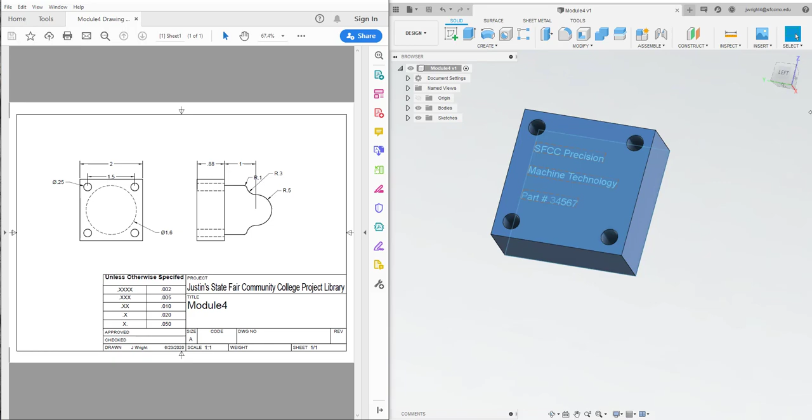We need to put the text in on the back side of this thing, and then we can do a second operation. The second operation will include making this shape on the back side. Now there's a couple different ways that we can make that form or shape. Drawing wise should be pretty straightforward. Manufacturing the second side should still be pretty straightforward, but we can play around with a couple of different ways to rough that thing in, maybe some best practices and just some options.

So what I want to focus on today is really two setups, creating two setups within the same drawing, and then also working on this 3D shape, being all curvy on top. All right, so I'm going to get this guy out of here and start a new drawing. I'm going to put it in my module, or my 134 folder. I'm going to call it Module 4 Video, and we will save it in Module 4. That way we don't confuse it with anything else.

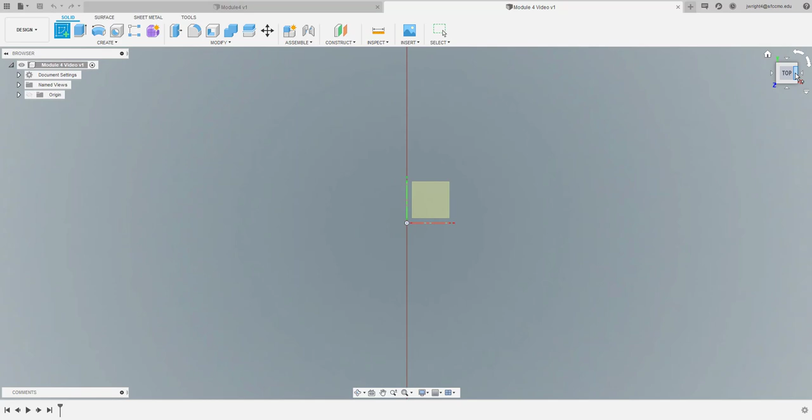Alright, so here we are. We're going to start out just going on top. That's probably not the best way to start out. I probably could have started out this way, but that's okay. We can change it as we go. It'll make drawing just a little bit easier. So square this thing back up again and zoom in and pan down just a little bit. Okay. I'm going to go ahead and make the shape of this part. I'll pull my PDF back up on the other screen so I can remember exactly what I did. Alright, so I'm going to start creating my sketch.

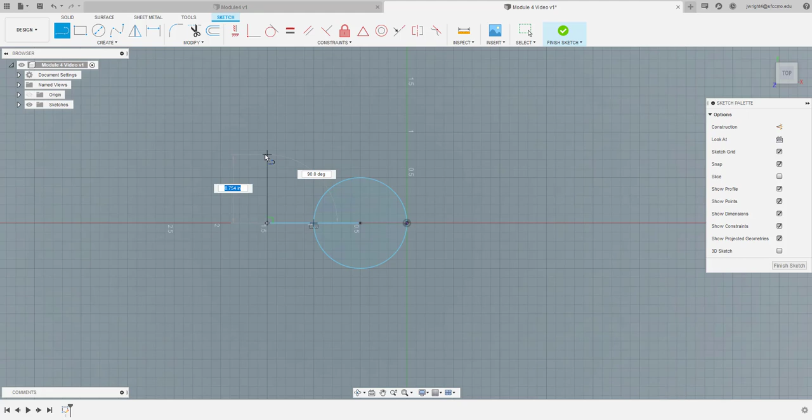It looks like from here we've got about a ½ inch radius. We're going to go from here to here with that guy, and this other diameter is 1.6, and it goes back, let's take a line back here from the center of this point. We go back 1 inch, 1 inch will put us right there. Just get ourselves some shape here, and we need to come up a little bit, and we need to get our 1.6, so we need to go up 0.8, and that is 0.88 on that, and then we'll just go tab, and we'll go 90 degrees. Okay, so we got that.

We can just come straight down from there. Just bring a line down here, and we can trim that out as we go. At this point, I'll need to extend this line out to here, and then I'll trim away a couple unnecessary components. Pretty sloppy on the drawing right here. I could trim this and this as well.

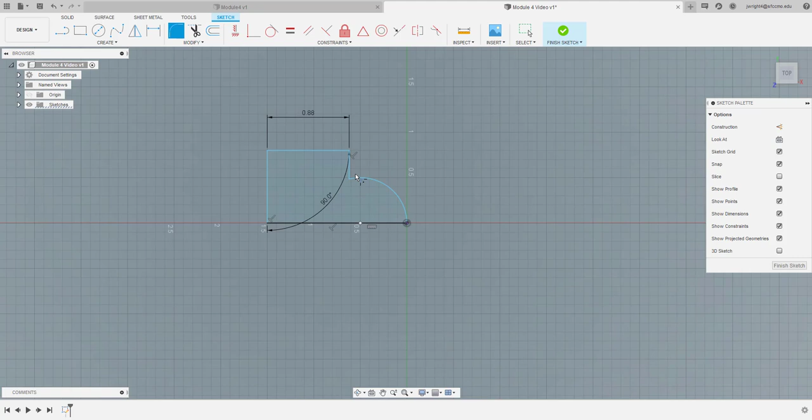Now I think I've got a 300 thousandths fillet that goes in right here, so it's going to be 0.3, get a little bit bigger, there we go, bring that in just a smidge. Okay, and I got a 100 thousandths fillet that goes around the outside edge here, so put this here. Whoop. Nope, get that thing on there.

Alright, so that is going to be my first part of this thing. And maybe, I think I'm off just a little bit here. I started looking at one thing and started working on another. Let's see, let's go back and double check a couple things and make sure that we're jiving right.

So from here to here is 1 inch, yes, and that makes that 880. Overall height is there, and then we are ½ inch from here. Yeah, so we're good. Okay, just taking a look at two different things that I had going just to make sure that we're still staying with it.

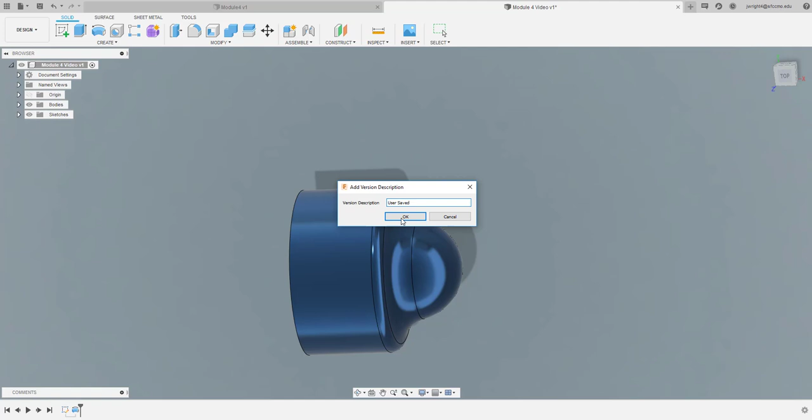I have not drawn my square on there yet, so what I'm going to do is I think I'm going to go ahead and finish this sketch, and then I'm going to do a revolve, and so it's already highlighted my profile. I just need to select the axis that I want to do my revolution from, and so that takes care of this part of it. Hit OK. I'm going to go ahead and do a quick save, take care of saving that part.

Something looks a little bit off here. So if you look back at my original, I've got this curvature here, and then I've got this radius here, and then I've got another radius, and if we pull the other one back up, the curvature is not quite the same. So I got something janky going along here. So I'm going to go back into my drawing,

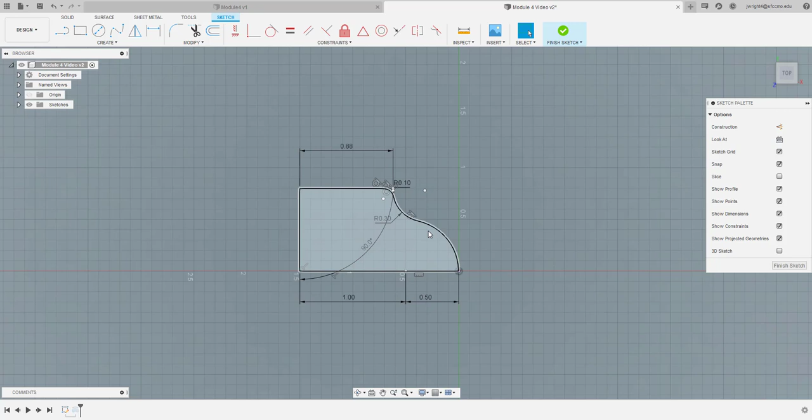and I've got a dimension off somewhere, and I've got my ½ inch radius, so let's just put a couple dimensions here to see what we got going on here. So we've got our ½ inch radius here. Yeah, so too many dimensions on it is going to start to constrain it beyond the constraints that it's already got. So it's already got this ½ inch right here. So if we take it out, then we make ourselves good again. So we'll take this out, delete it. Now we can probably put this dimension here and probably be okay with it.

Yeah. Okay. So I've got a 300 thousandths dimension there, but I've got a little bit more curvature in this area. So what that's telling me is that my section right here must not be 880. Let's pull this back up here. So this section cannot be 880. So what we're going to need to do is kind of back figure some portions just so we can get this section stuck back in there and get it in there right.

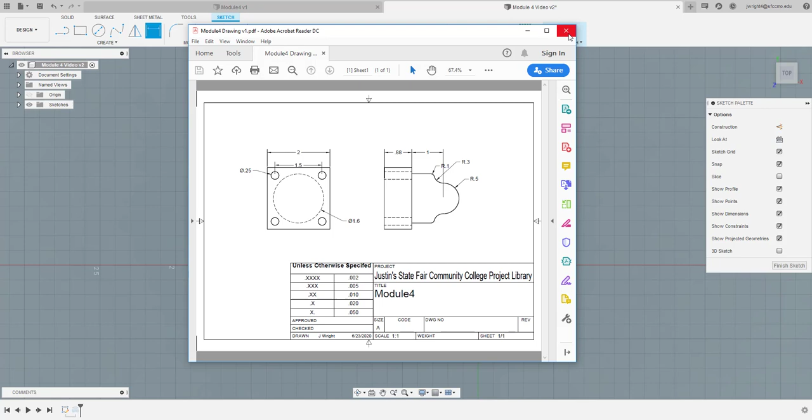Okay, so I don't have that on the print for that dimension, so I need to figure out what I've got going on in order to make that section come back in. So I'm going to take this dimension out, and I think I'm going to go ahead and just take this out as well. Just pull these two guys out of here. I really don't need this either. So I will put a line from here to here, and we'll go up straight from there, hit escape to stop that line.

We'll go over and extend this line to here, and then we no longer need that. Delete that thing out. Oh, let's see. No, instead of deleting that, let's just move it. Or put another line in here. And let's say that that 300 thousandths fillet is 90 degrees. So I'm just going to move that 300 back. And then I'm going to come back out, kind of doing a little bit of extra work here. Bring this out.

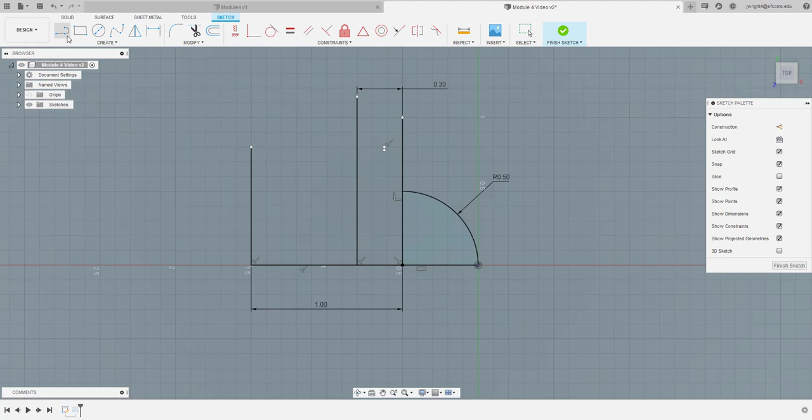So let's just put a line here to here. And then let's put our fillet of 300 in here. 0.3. That looks better. So now we've got a line that we can run across here. And then we can put our radius of 500 there. That looks a lot better. So just out of curiosity, what's that put us? So just from the center to there. 621. So somewhere around 5/8 would be up here probably.

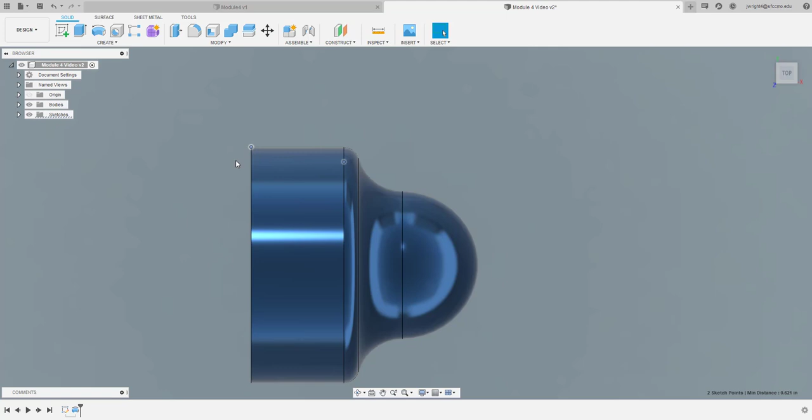Okay, I like that a little bit better. I think that that should look better. Should look more like our original drawing. Yeah, now we're talking. Now we got apples to apples. Let's see, let's go back, just do a quick double check. Yep. So you got from 90 degree point, center point, you start that 300 thousandths radius, and then you come in here and you got that 500 thousandths radius.

Okay, so now here is our drawing zoomed up, and what we don't have is the square on the back side. So what we'll do is we'll start a new drawing.

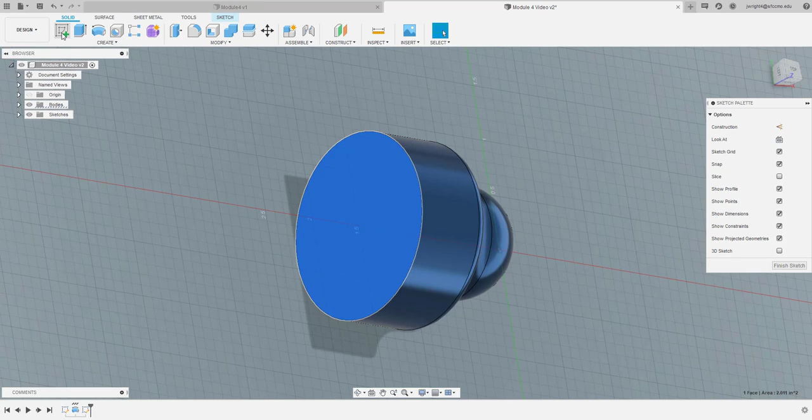And we're going to take it, let's get this thing to fit back in here. Sucker zoomed out on me. I want to take it from the back side. And so my new drawing is going to start from here. Let's see.

I need to start a second sketch, so I'm going to delete this out. Come back over here and do a new sketch, and we're going to go from, so we can still take it from the top if we want to, but I think what we'll do is we'll take it off of this face here. Okay, I'm going to flip it around backwards, and I'm going to straighten it up, rotate it around one more time, and then I'm going to make a 2-inch square on the back side.

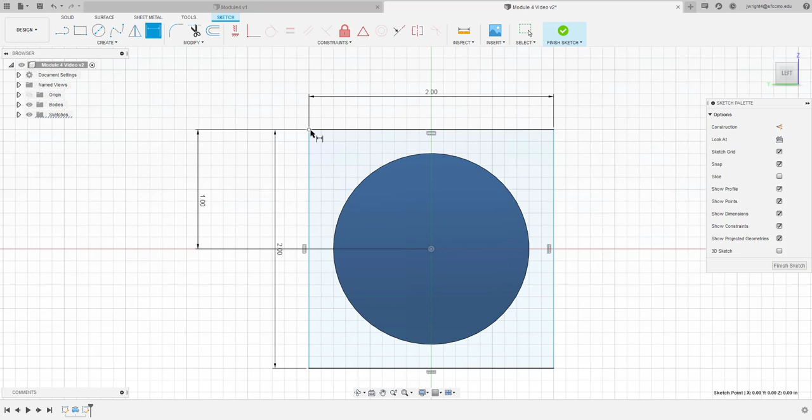So we'll go to tab 2, and that takes care of both of our dimensions. We need to get it centered up to that circle. From here to here will be 1. That should put us in the middle. We'll double check that by adding another dimension here. So from here to here is 1 as well. Okay, so finish that sketch.

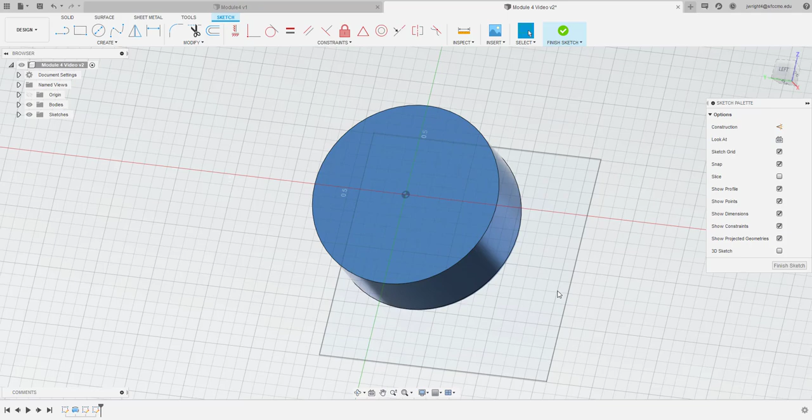Uh-oh, we need to push that thing back. It's on the wrong side of that thing. Alright, so let's do this instead. There we go. Now we're where we want. Okay, put that back up there. I'm gonna go ahead and delete this guy. Actually, I'm going to delete that guy right here. And we're going to just go ahead and work off of this one here.

See if that puts it on the same plane. There we go. Now we're back in the right plane of what we want to do. Finish that sketch. Now we can go back and delete this guy out. Okay. So there we are. Now we're in the right spot. Go ahead and extrude that thing. We're going to go out 880 on that extrusion.

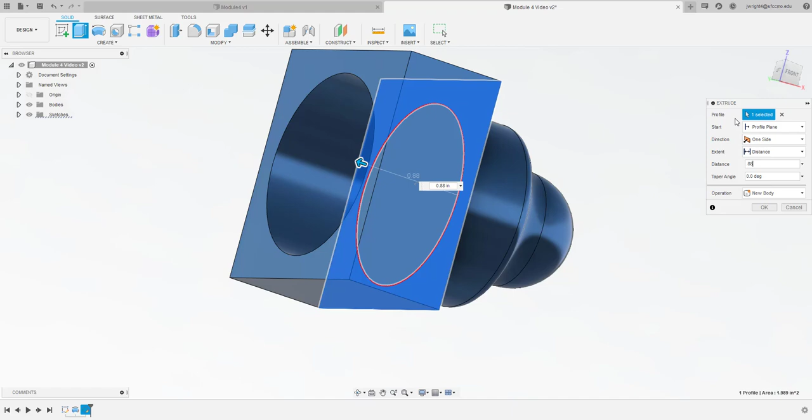Now, you do end up getting that gap where you've got a hole in the middle of it, because what you've done is you've got that existing one, and then we just put that other part in it, and so we'll go ahead and grab that part as well so that we can get all of that out instead of having two separate things on each other. Okay, and so now we've got our little die. Go ahead and do a quick save. All right. You know, it'd be nice to have a little radius down here in the corner, but the original drawing does not have that.

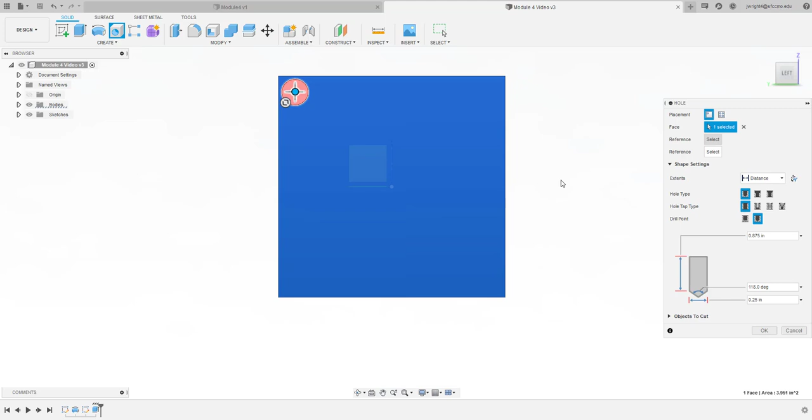Okay, so I want to put some holes on the back side of this thing over here. So go back to the left, rotate it around just to get back up, and we're going to go ahead and put a couple holes in it. Put 4 holes in it. Let's put a hole here. This hole will be 1/4 inch in diameter, and it's going to be a 1.5 spacing, so we're going to go 1/4 inch and 1/4 inch in.

So 0.25 and 0.25, and let's see, it needs to go through, so it's got to go 0.88, takes us all the way through. Let's double check that we're all the way through. Yep, got a hole all the way through on that thing. And so I want 4 of them, but I want them to all work together.

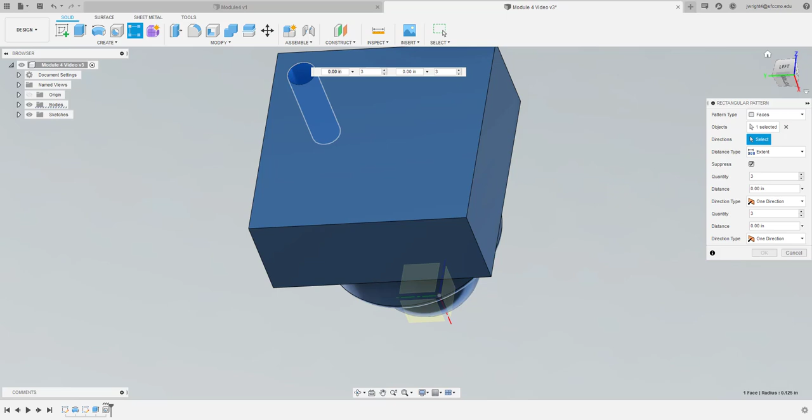So I'm going to go do a grid, and I'm going to select the object. Okay, and the direction that I'm going to go. Slide that down a little bit more. Okay. The direction I'm going to go. I want to do 2 going across there, and the distance is going to be 1.5, and then down I'm going to go 2 holes, and I'm going to go 1.5, and that should end up with a decent grid of holes.

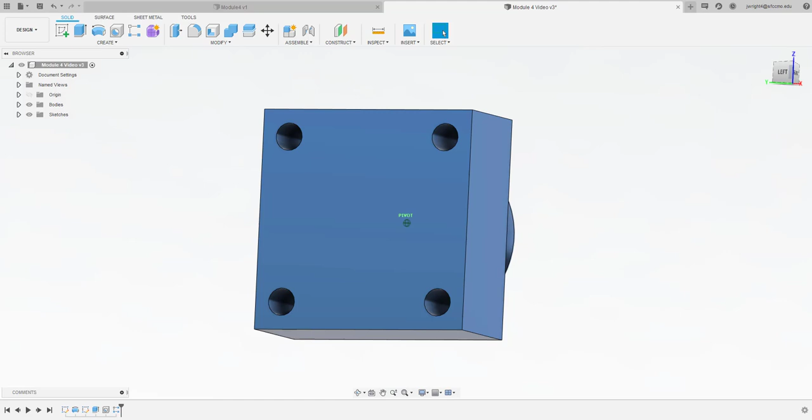And let's see what they look like. There we go. And so we've got 4 holes in there now. Match up. Everything looks pretty good. All right, so we've got our block, but we need some text on there. And so if you go back to my original one, rotate it around. Where was it? I've got SFCC Precision Machine Technology, and then the part number. And then I've spaced those out, just kind of centering them up on the back side, and we'll center those up just like we have them.

So we'll go back to our drawing, and we'll straighten it up here, and we'll come in and just add some text into that. All right.

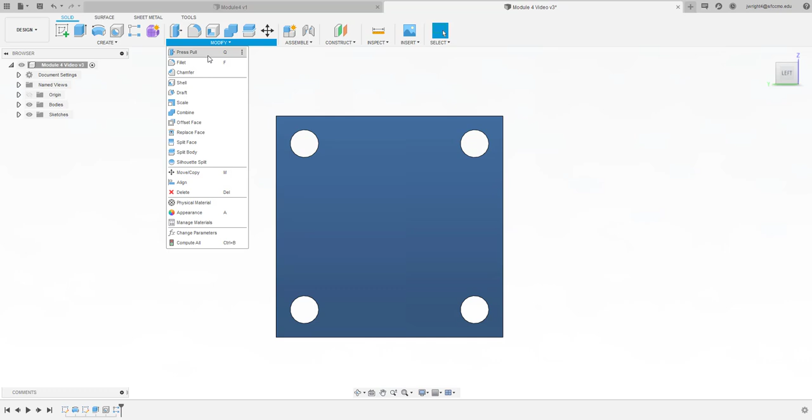So we'll work off of this guy here, and we'll just add text like this. We'll start, work off of the grid. I'm going to change my height to 0.1, and I think the first one said SFCC Precision Machine.

That's not the same. Okay, SFCC Precision Machine Technology is the second line. So I'm gonna go back in and change that. So just double click on it. Just go back over there. Precision, and gosh, I feel like that could be a little bit bigger on the font, but I'll leave it alone for right now. If we need to change it, we can.

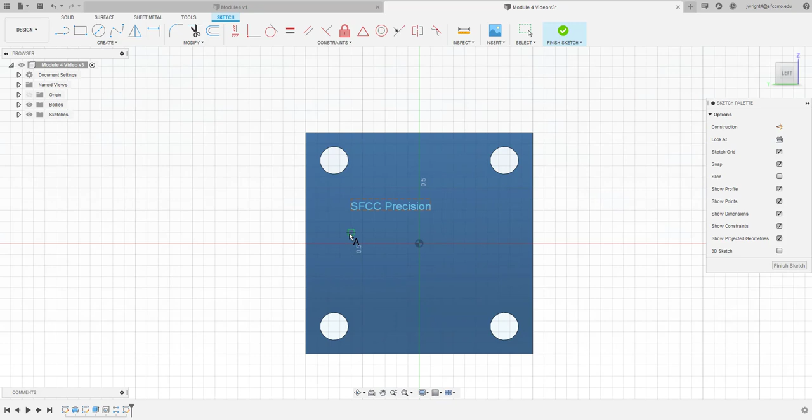We'll go ahead and do a second line of text there. Let's see. Back to the 100. Okay. That, and one final line. We're going to pull that down just a little bit lower. And maybe we can go with a little bit higher on that text just to see part number.

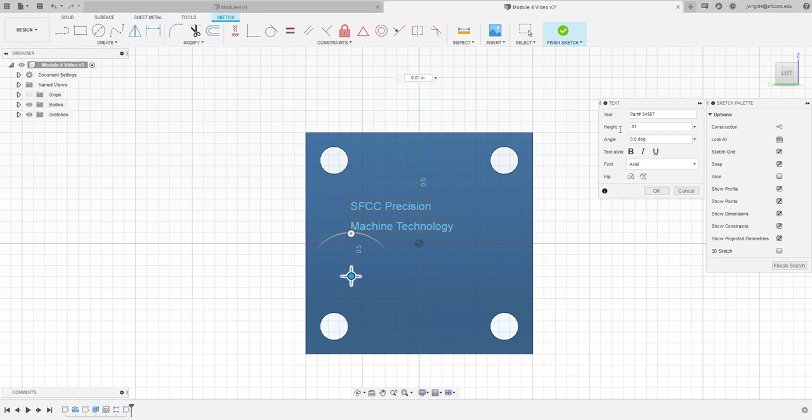And 3, 4, 5, 6, 7. How about that? That looks pretty good. It's probably too big. Let's go ahead and move back down to 100. Yeah, I could probably go up just a little bit more just to kind of keep it in line with the rest of it.

And hit OK. Alright, so all we need to do is make sure that that is pretty well, it's not completely centered, but it would be readable, and we don't really have dimensions for where that goes, so we'll hit Finish Sketch, and then we will save it on there. So we've got something similar on that. This one's probably a little bit better spaced out.

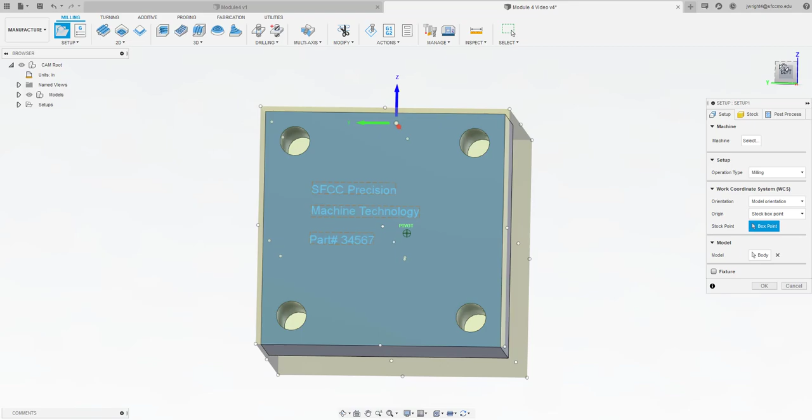So here we have our etching or engraving on the back side. That's going to be our first side of our part. Okay. So we've saved, and so now we're ready to go into manufacture. And so we're going to go ahead and start setup on this part. Now, if you'll notice, XYZ is all in a janky, wonky place, and so we do want to take a shot all the way around this thing. So we want to mill around the outside and we want to do a face mill pass across the top.

X0, Y0 is going to be the thing that we need to work out first, and so I would put this part probably at the middle of it if I could, or go to one corner. And so I think you could do something like that. That would not be too terribly bad. This is going to be the top of the stock.

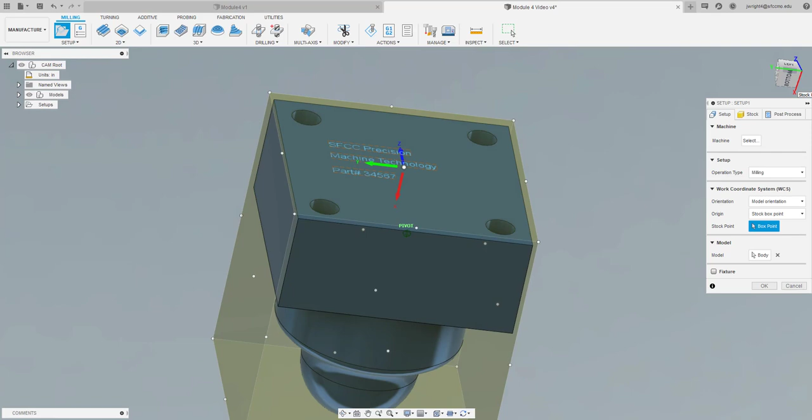Okay, so the only danger in taking the top of the stock is that you kind of have to remember where everything is at. So one thing that we can do is go ahead and go into a selection of where we really want that thing to be at, and let's go back and change around a couple things here. I want my X0, Y0, Z0 to be

now I'm on the actual physical part itself, okay? And so that helps making this face, this machine face 0, and then all my engraving would be down from the actual finished face of that. Now what I've got to do is I've got to flip some things back around so I can get my Z-axis in the right direction. So Z, and that would be correct.

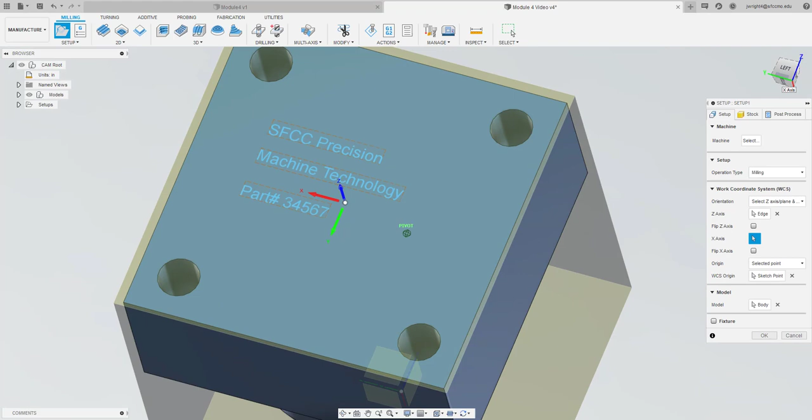So I'll look at my part, and I need to change my Y. So let's flip the X. Actually, let's do this. Let's do Z and Y. There we go. That looks a lot better. So that stuff can be avoided by just really kind of starting out with a little bit better setup. And sometimes I think you can kind of start to play with it and mess around.

Sometimes you're going to be given a drawing that somebody else created, and then you're going to need to work off of it. So you need to know how to be able to move these around and change them to the places that you want. Okay. We've got our X0, Y0, Z0 on the center of the part, on the top of the finished edge.

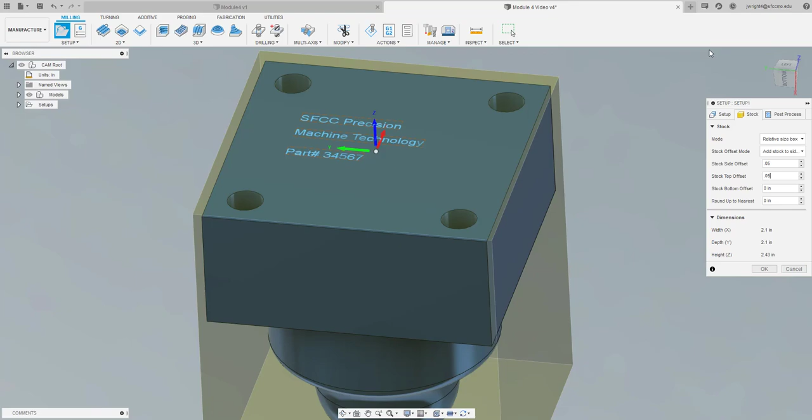So that means when we set our work offset, we're going to come in and find the center of this part, and then we're going to either probe it or use a 1-2-3 block, come off the top with the spindle. We're going to need to come down a little bit more with the offset for Z. And let's say that, instead of 40 going around it, let's just say we got 50. I realize that those are insignificant numbers, but it'll help me at least. I think 50 is a little more rounded than 40.

Okay, I'm looking at my part. I feel like it's okay. I guess I'm a little unhappy with these numbers down here. 2.1 by 2.1, and then the Z of 2.43. I can live with that. Again, at this point, it's not going to matter. It doesn't matter how big we make the part. We could say

stock size around the outside of it is 75 thousandths, or I guess we could make it 100 thousandths around the outside of it, or 125 around it. That would make it a little more of a nominal size of stock, 2 1/4 by 2 1/4. And then we could go with a bottom offset of 70, and that would make it a 2.5 part.

And the only reason that I'm doing that is because I'm trying to keep some numbers even, for if we were making this part, just for ordering of material and saw cut, trying to stay in some of those nominal numbers. Okay, so I've got this set up ready to go, and I hit OK.

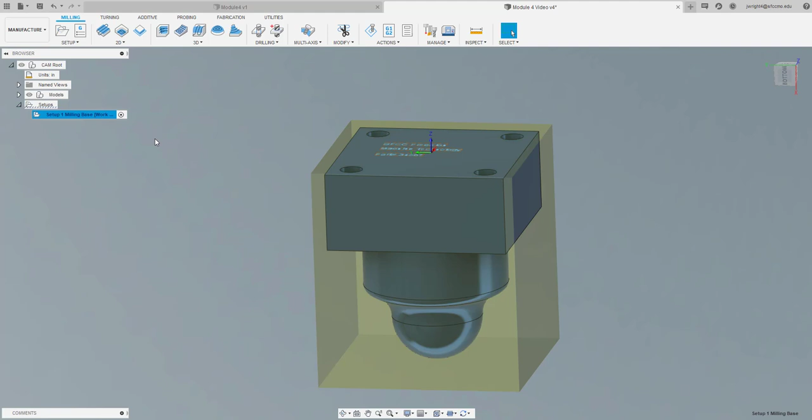So one of the things that drives me crazy about this program is on our work coordinate system, 1 I believe is 54, 0 is 54 as well. Now, if 0 is 54 and 1 is 54, then it just makes sense to leave it at 0. But whenever you go to post process, sometimes that's going to cause some type of error, or at least a note, and we'll try to eliminate as many of those notes and errors as possible.

Okay, so we'll go ahead and complete our first setup on this whole part. What we want to do is mill around the outside. We have to have an end mill that'll stretch at least 1 inch depth of cut going around this part. And then we need to bring in probably a 3-inch face mill, and then I think we can probably just 1/4 inch drill these things.

It doesn't call out any kind of chamfer on it, so if we needed to chamfer it, we could always hit it with the cordless for the outside, just to break those edges. You could use a whirly bird or anything else. What we're concerned about right now is milling around the outside, face milling it, drilling these holes, and then doing some engraving on this part.

All right, so we've saved it. We'll go ahead and face mill it real quick. By now you should have started to build a little bit of a tool library, so you want to pull from that. I'm going to use my 3-inch Kennametal face mill. I've already got some RPMs set up, probably a little slow for what we've got, but it'll be fine. We're going to mill this face,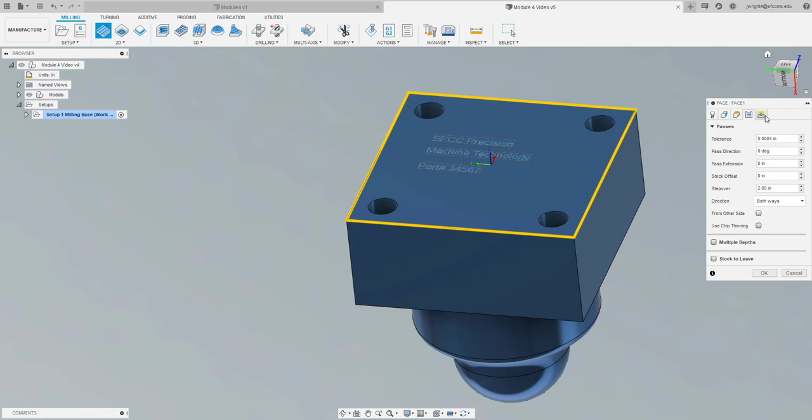and I think I'm okay with everything else here. Probably change my extension. Let's go 1.6 beyond. That'll just get that part going through there. And let's see what it looks like. Okay. So I'm going to face it off. And now I want to mill around the outside perimeter of it. So do a quick save.

I'm going to do a contour around the outside. I want to go down to the bottom of it when I do that. So choose my next tool. I want to start thinking about the tools that I'm using for this part. On the second side, I've got a 3/4 inch end mill that's got a 40 thousandths radius on it, and that's what I'm going to rough out the other side with. But I'm also going to use it to finish this.

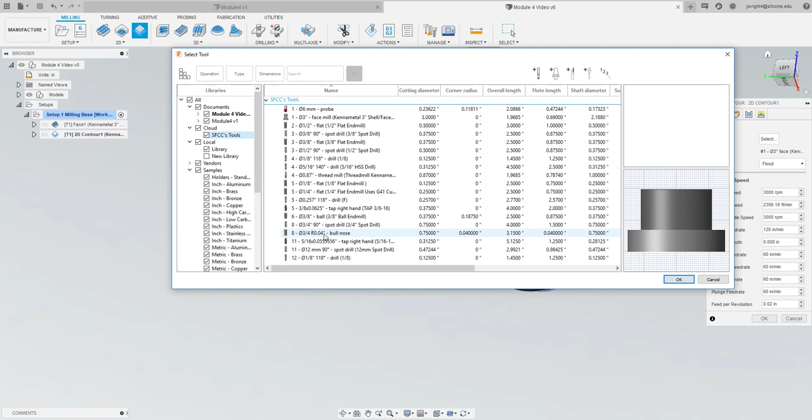So it's 3/4 inch in diameter, and it's got more than a full 1 inch length of cut on it. The overall length on it is 3.15, and it says here it's a 2 flute. I actually think it's a 4 flute carbide end mill. Oh, I've already got carbide selected. We do need to do a quick modification to that, so we're going to edit this tool.

We'll also need to change tool numbers on it. So it's a 4 flute. Let's see, flute length is not 40 thousandths. The tool nose radius is 40 thousandths. I think length of cut is, let's say it's at least 1.25 inches. 2 inch to the shoulder, probably more like 1 3/4 on the length on it. Body length is about 3 inches.

So we're just going to call body length and shoulder length at 3 inches. I don't want this thing sticking out too far. I don't want someone to see that and let it stick out too far. Okay, so we are in inches. We are 4 flutes. I don't know holder positions yet. Pretty sure that's a Kennametal. We're going to call it Kennametal EM.

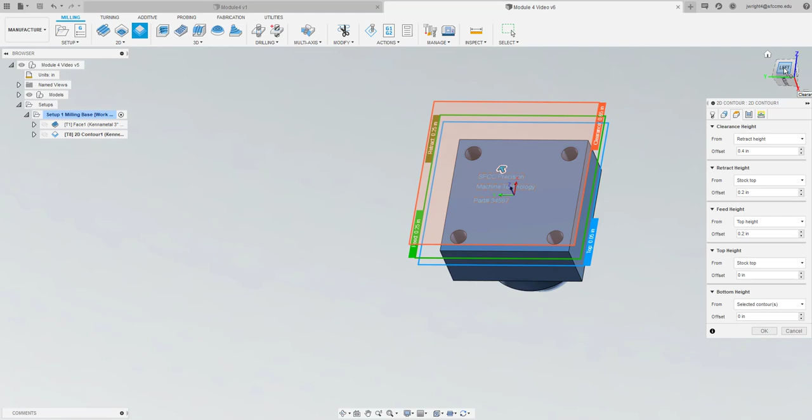Okay, and I'm going to select that thing. And then we're going to select our contour. Come down to the bottom of this thing. It's already selected to go around it left to right. Now what I want to do here is bring this thing down. I want to go down just a little bit lower than it, maybe 100 thousandths lower than what we're going to run. Nope, that's 10 thousandths lower.

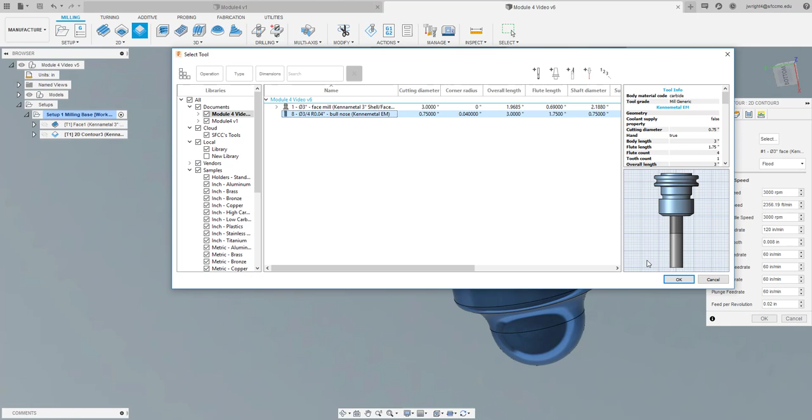And so let's see the bottom height. I'm going to go into selection. Bottom of the cut should be down. Let's back up from that. Did not mean to back up quite that far. Already edited that. It's good. Go back, select our cut, and then let's see what that looks like now, and then we'll go from there.

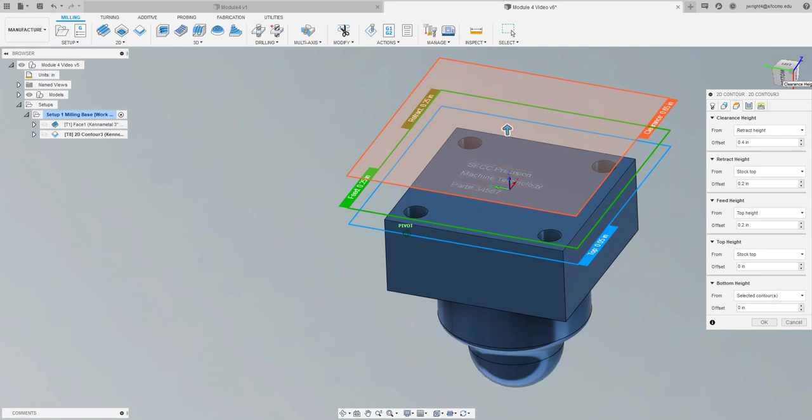Okay, so like I say, I want to go down lower, because what I don't want to do is come up with a possibility of leaving a really thin edge there. So I'm going to go in, change that, and I want to go down below it. Get this thing straightened up. So let's go down. Let's go minus 50. See what that looks like. 50 should take care of it. All I did was give myself an extra 50 thousandths to take that down.

According to my print, it's really got a ton of tolerance on it. But I'm thinking that's probably not going to work out really well, because even though the part itself is 2-inch square and it doesn't call out any critical tolerance according to the PDF, I probably want to set my second operation as a set of soft jaws or some type of fixture, toe clamp, nesting into a corner, so that I can get some repeatability off of it. So even though this 2-inch by 2-inch square is not critical, I need to treat it as critical.

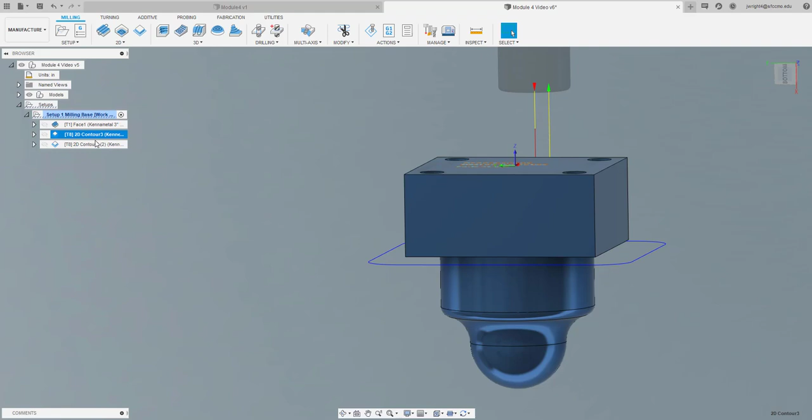So what I'm going to do is duplicate this. I just right click and I duplicate it. And I'm going to come back up to this first one and do a quick stock to leave. I want to leave nothing axial, for Z. I want to leave about 10 thousandths around the outside of it, okay? And that's going to give me 2 passes. You can see that pass is a little bit further out than this pass, okay?

Let's go from the top, and we'll check this part out, see what it looks like up until this point. So we've got a square. We're just going to say that's 2 1/4 by 2 1/4, and we'll speed this thing up just a little bit. We got our face mill. We're going to go around the outside of it. Okay. We are left with a little overlap here. You can see this is the corner radius in there.

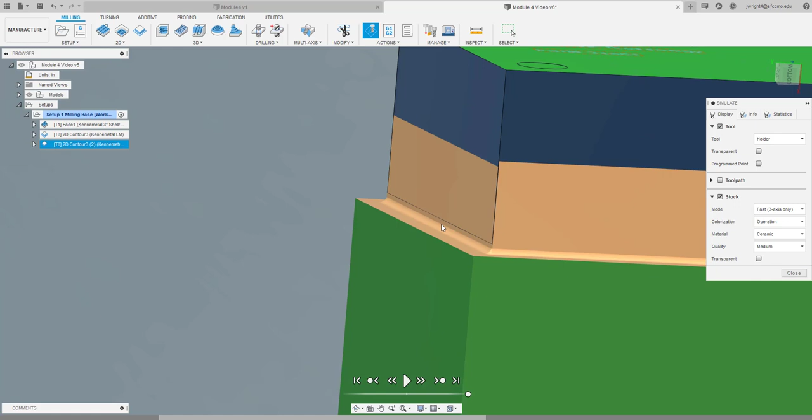So since we've got a 40 thousandths corner radius, I'm going to back this up into medium. We've got 50 thousandths. It's only going to leave us about 10 thousandths. I'm probably going to go back in and do some changing on that. So instead of 50, I'm going to go back. I think originally I'd said 100. I'm going to go back to that 100, and I'm going to do that again over here to make sure that that matches.

I'm going to go ahead and just take this off and go back to standard for that. There we go. So now I'm really getting about 60 thousandths of solid sidewall from that section. So I get this corner radius of 40, but all that's going to be long gone by the time I'm finished with my part. Okay.

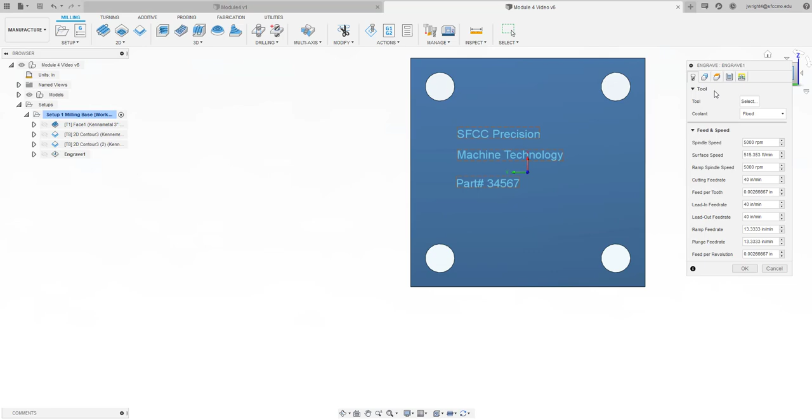So the only thing I have left to do now is to take this part, do a quick save. Here my computer is starting to wind up. And I need to go ahead and do some engraving. And so I'll hit my engrave. And I need to select a tool.

Now for your engraving, you'll want to make a tool. I think you could either create or use something that was already a spot drill. I think you can do it with a small spot drill. I also think that you could do it with a really small ball end mill, and it would look really nice. And so what I'm going to do is I think I'm going to go in, and I've got a ball end mill already that's 3/8 in diameter. Trying to see if I've got one already set up that's something close to that. It doesn't look like I do.

So I've got this 3/8 ball. I'm going to go in and duplicate it. And I'm going to edit it. I'm going to change it up some. And so I'm going to call this a 1/16. So 1/16 ball. And I'm really not even sure that that's going to be great to use. So I think on that, I think it's got an 1/8 inch shank on it.

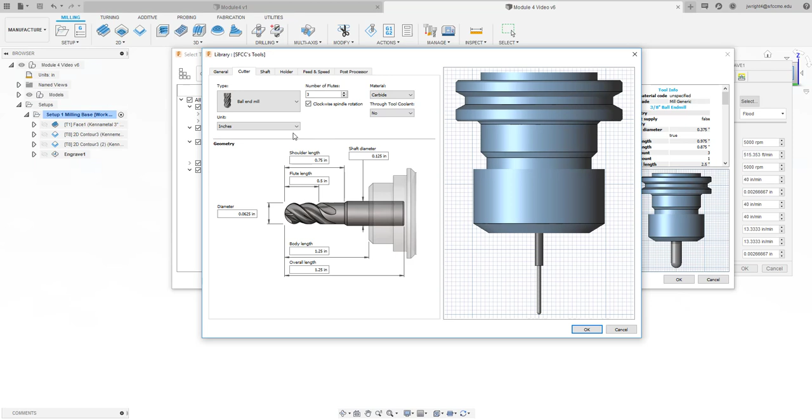Let's look at speeds and feeds on this. On something like this, it's so small, and carbide 3 flute can't really go too fast on it. Chip load will pull down to 2 thousandths. And let's go on up to, let's say 8,000 on our RPM. Okay, so we've got it sitting as tool 6. We'll leave that for now. Probably need to go in and do some changing on it. So that one takes care of that. And now we need to figure out what we want to engrave.

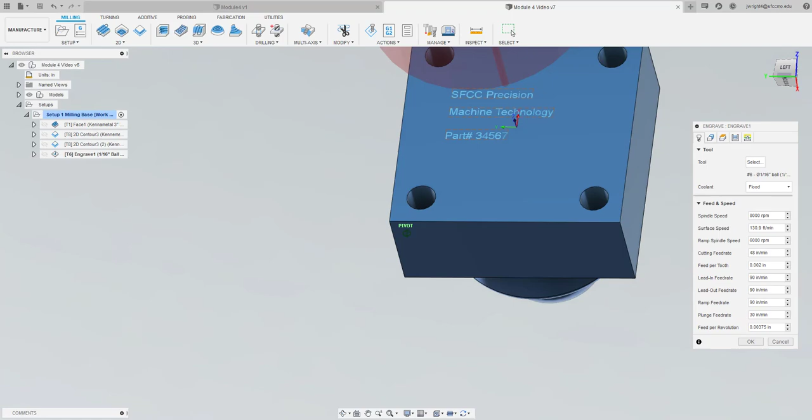It's really kind of a big tool for our engraving. That's what my real hesitation is in here. It's got that 1/16 in diameter, and you're just not going to be able to go very deep with it. Now, if you use something that was a little more sharp, a 90-degree spot drill or something like that, you're probably going to get something that looks a little cleaner. I could increase the text size on that. That would help on that part. Okay, so let's go ahead and go in and see where we're at.

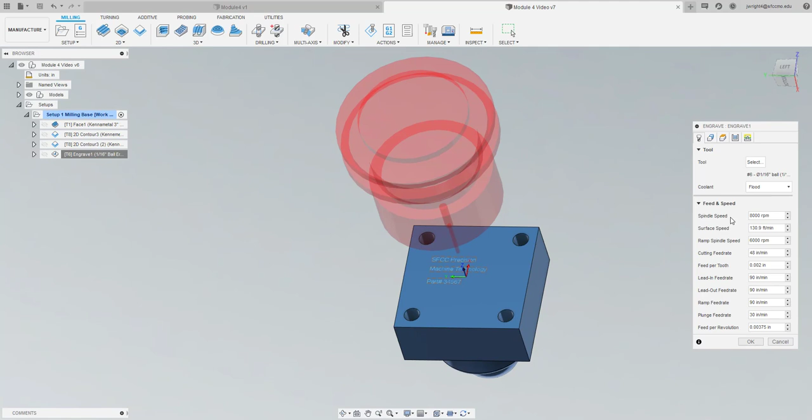Alright, so something doesn't want to move here. So I've selected the tool, but let's just hit OK from there. Okay, so we must have been stuck in something. All right, so we've got our tool selected. We'll go ahead and select our contour, our words that we want to engrave, and let's add. I think I grabbed that line right there, so let's back out of that. And so I'm going to select these 3 lines of text, 1, 2, and 3.

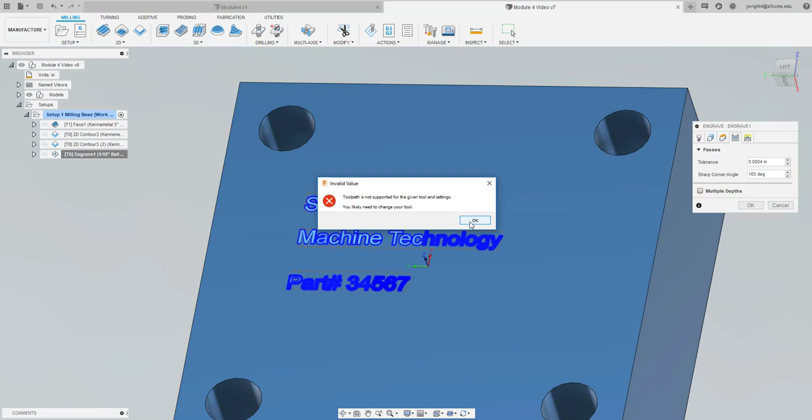And let's see what it would look like from there. So my tool itself is going to give me just a little bit of problem, so I'm going to need to go in and find something different or create something different. So let's go back in, and instead of using that thing, we'd still use this tool, or we could duplicate a new tool. So let's just duplicate this guy. We're just going to change it while we're here. We'll edit it, and we're gonna keep the same diameter of this thing.

We're just going to say that we've got a really small spot. Let's actually do this instead. Engraving. This is the only thing that this thing would be used for. And so what I'm going to do is I'm going to change this to see if I've already got an option for something that is an engraving tool. I have a chamfer mill, I have a center drill, I have a spot drill. Now if I use a center drill, that's pretty small. It's got a lot of other options on here. We could definitely use it, probably just for ease of just popping numbers in there.

If we go to our spot drill, it'll be a little bit simpler on our choice. And so I don't have one of these, but we'll need to find one of these. We'll change this to 90 degrees, and see, our diameter is the same. We'll call it still 1/16. And let's see what that thing will look like for us.

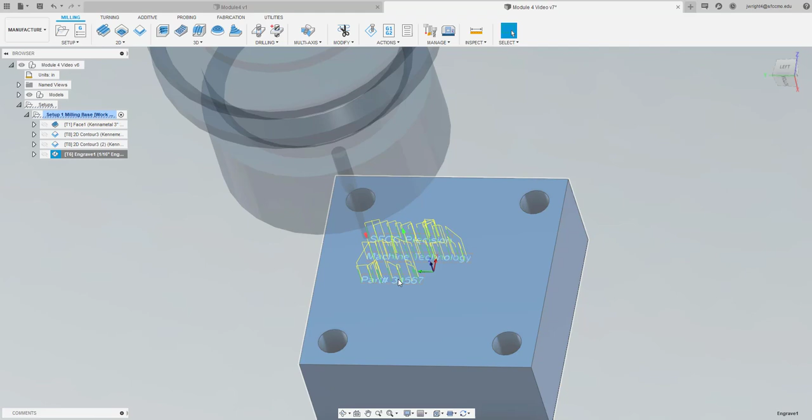There we go. Now we can get in. That was really my fear of using that ball in there. I mean, we've got a really small 100 thousandths on our text height. It's pretty small. So let's run this thing through full.

Oh, actually, before we do that, let's save it. And then we will go back and run it through graphics. Speed this thing up a little bit. Okay, that looks pretty good. Now, one thing I probably should have done sooner. Engraving's typically my last thing, and we can still take care of that as we go. We'll go ahead and do our holes.

So I did hole recognition, and I've got a spot drill, and what I want to do is just change that to just drilling. I don't want to spot drill that hole. Okay, so if I come in here and I do spot drill and drill, it's going to automatically pull up a spot drill. Now if I go in and do a simple drill, I might be able to just get the drilling itself. Let's see what we get.

So we just gotta wait for a second down here at the bottom. We've got that still generating. Once we've created that, we can come in here, and still it came in, so I end up having to come back in and do some modifications. I don't want to spot drill it, so I'm going to delete the spot drill out of it.

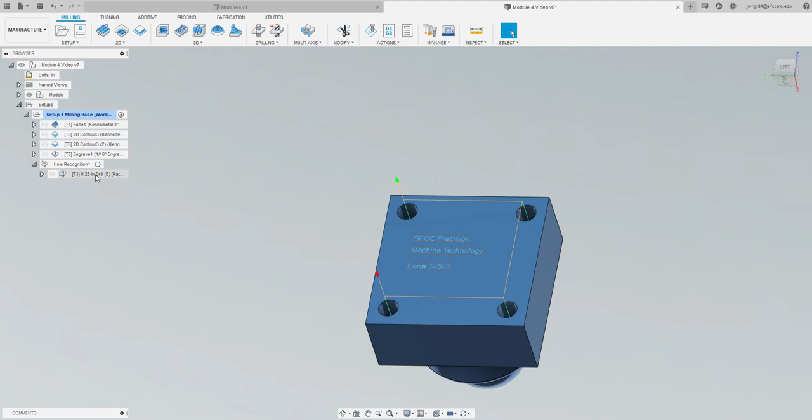And by using that simple drill cycle, my suspicion is I'm not peck drilling, so I'm just going to do a G81, just drill in, drill out, which is probably okay on this part. I mean, we're talking about an inch, but it is only a 1/4 inch in diameter. So I want to go ahead and do a deep hole drilling, full retract. And let's peck down 100 thousandths at a time. And no dwelling. Pretty okay with everything else.

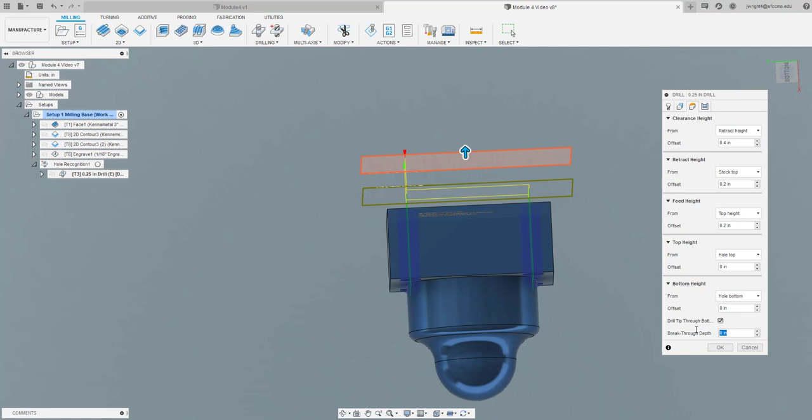I don't know if I already had a 1/4 inch drill available to use or not, but I'm just barely going through there, and that should be okay, but let's see if we can make our drill just a little bit deeper, just to give ourselves a little bit of safety on that. Yeah, let's go down about 50 thousandths through that. All of that area gets cut away on our second operation anyway, so it shouldn't be a problem.

So if we look, we've got tool 1, we've got tool 8 running 2 times at the rough and a finish, then we've got a 6 for engraving, and then we've got our 3 for our drilling of our hole. Now, if I want to change some things around, and I probably will, I want to edit this tool. That's our face mill, and I'm going to change it to tool 2. I'm going to change this one, edit tool, and change it to tool 3.

Changed both of those. I'm going to go ahead and move this guy up above that. So all I do is hold down on my left button and move it. It doesn't really matter where that part is, but we can go ahead and move it up there too. I've got a 2 and a 3, and this drill, we'll go ahead and edit that tool. We'll make it 4.

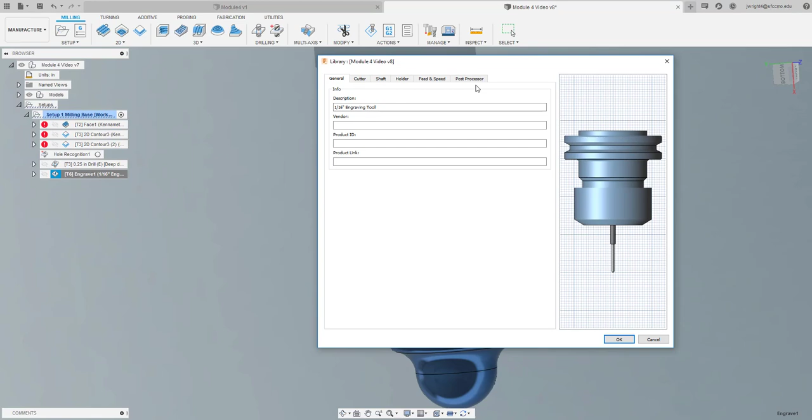Let's take a look at it while we're here anyways. This is one that I did not have set up. It's just one that the machine picked for me. I think I'm just going to leave it for a second and come in and do some changing on it. So this is 2, 3. This will be 4, and we'll make this guy 5. That's one that we created. And so we will post processor, go to 5, and go back to that.

I want to go back to my 1/4" drill and make some adjustments in it. I just want to choose a different tool for that. So I'm just going to go in and edit. Go back over here. See if I've already got a 1/4" drill set up in my options. I got a 1/4" flat end mill. I do not have a 1/4" drill, so we'll go back to the one that we're working with. And here we picked a 1/4" drill.

It's not going to be able to be tool 3, so let's go back in there. Let's hit OK, and we're going to go back and cancel that, and then we'll come back up here and edit the tool.

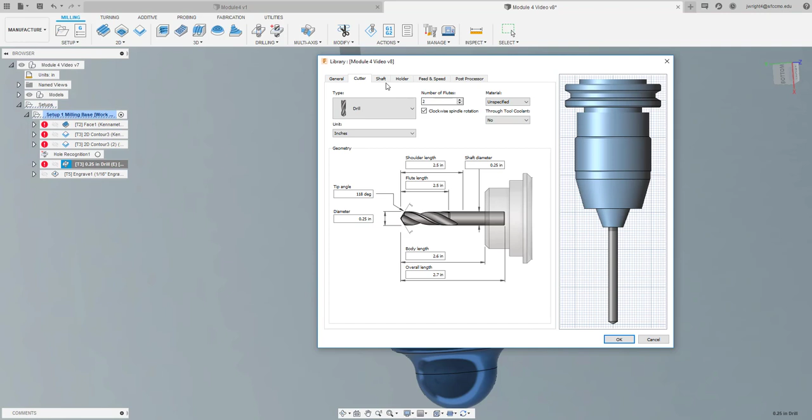Call it tool 4. Go back over here, and it is going to be a 2 flute, and let's say it's not a carbide. Let's say it's probably going to be just a regular high-speed steel drill. Probably go down just a little bit more in my RPM, somewhere around the 4,000. I have not yet calculated my speeds and feeds for that, but you can do that on your own. We'll give it a 5 thousandths chip load though. Okay, now we'll go through there, and we're okay with that.

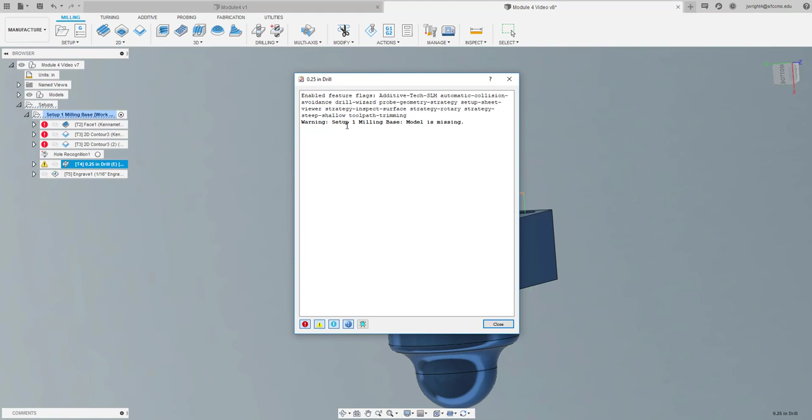So now I've got a bunch of tools that no longer function because I've got all these circles with the exclamation point in them. And so if I do a Control G, should be able to fix all of those together at the same time. Oh, I did not have them all highlighted, but let's see. Oh, missing the model. So let's go back, and I'm going to click here and I'm going to fix all those, and Control G, got those taken care of. All of those are probably just going to be the same thing of not having the model attached to them, so we can go back in and do that if we want to.

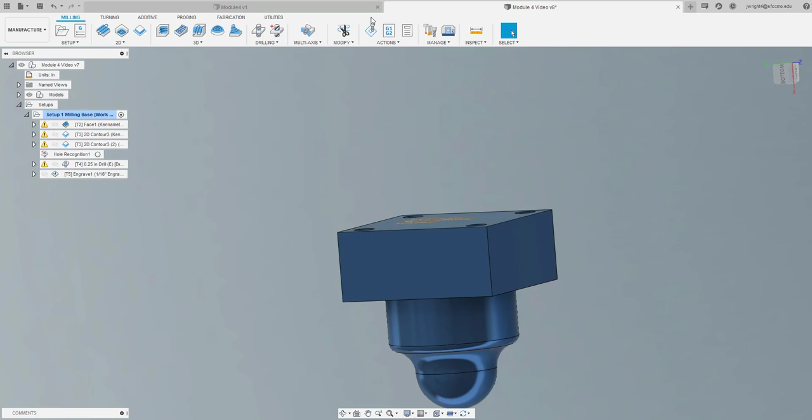Edit that. Go back here. Let's see. Not seeing it. I see the chain, but I don't see the model attached to it. It's okay. Let's go ahead and do a quick run through. Speed that up a little bit.

Okay, that looks pretty good for the bottom side of that. It would probably be a good idea to just zip around it with not necessarily this tool, but another tool just to break those edges off of it. But for what we have, we're okay. All right, so we'll do a quick save. And so what we need now is to create a new setup. So we have setup 1, milling the base.

So let's say we've completed all these operations on these parts, or maybe we've got it going in a multi-stage fixture. This part could just be dropped into a vise, 2 1/4" material, mill around the outside of it, face mill it, drill the holes, and engrave it. And then maybe we go to a fixture or a soft jaw operation for the second side. And so what we're going to do is we're going to go back into setup.

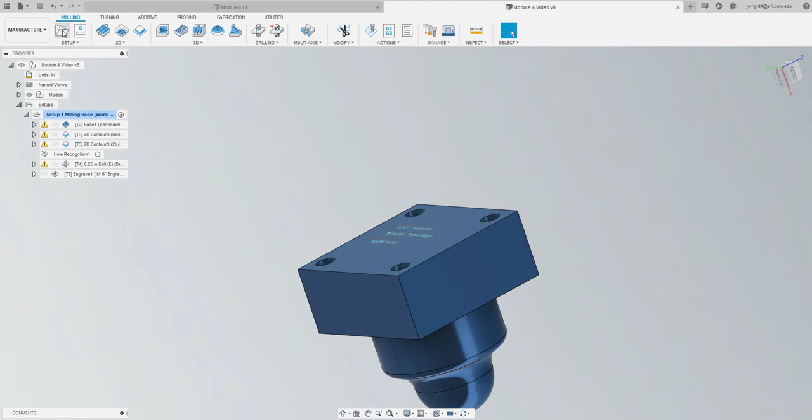And then we'll create a second setup, and so you see it automatically creates setup 2, and so our setup 2 is going to be flipped over here, and I want it to be on the finished part right there on the top of that. Let me move it down here a little bit, rotate it around so you can see it. So not the top of the stock, but on the top of the finished part of it. So I'm gonna go right there.

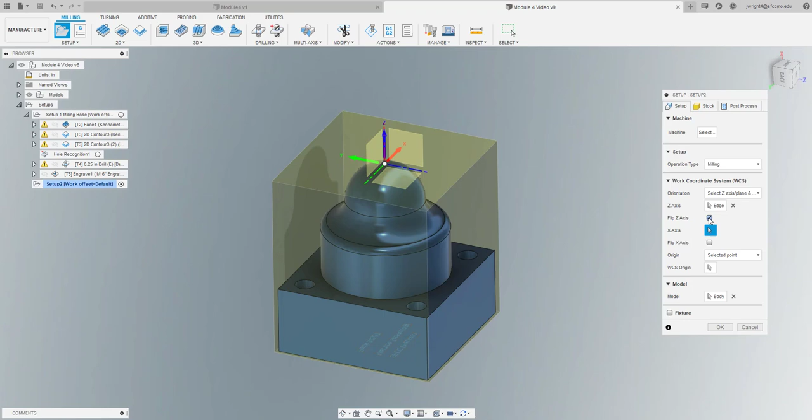For where am I gonna put my X0Y0Z0? So I've got it on top, but if you notice, my orientation for X, Y, and Z are not correct. So I'm gonna go ahead and change my Z and my X. So first my Z is going to travel in this direction. I will flip Z, and then, let's see, how do I want this thing to set?

Flip it over here, and I'm going to go ahead and change Y or X. My X axis is going this way, and I want to flip the X. There we go. That's probably how I will run that part. So now I've got my X0Y0Z0 sitting on top of my part. Right, flip it over, and so there I have that. And my stock.

By now my part is 2x2, so I've got no side offset. So I go to 0 on that. And then I think we had said on the bottom we had 70 thousandths or so. We don't really have a ton anymore. We milled some off the bottom side. That was 50 on the bottom side.

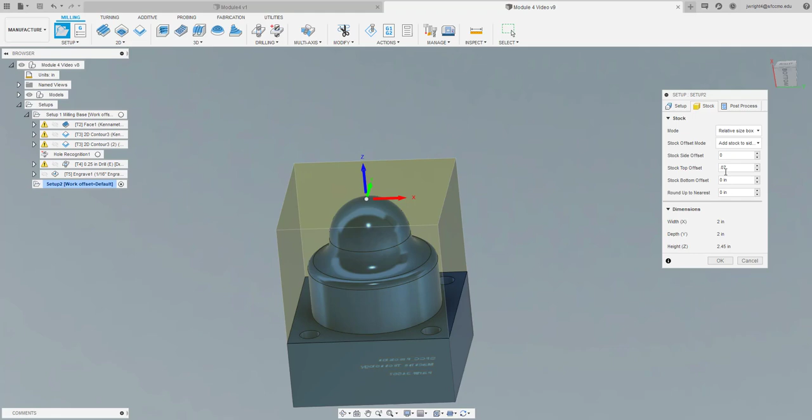Essentially for this part, it really isn't going to make a whole lot of difference, but we'll go ahead and change it to, let's see, what do we probably have? Do we have 50 on the bottom side? Actually, we must have 70 on the bottom side at 450. So we had 2¼ by 2¼ by 2½. We milled 50 thousandths off the top side. That leaves us with a block that was 450, and then that stock offset would be 70 thousandths on that top side. So that's what's coming off of the top there.

Okay. Now for our work offset, we're going to be in work offset 2 for our second operation. And that should be G55 for our offset. Okay, so that's going to be that part of it. And so if we want to change this, we just leave that at setup 2, or move that to setup 2, and we call this milling the form.

Okay, so on this part, picture yourself with this part sitting in there, and it's got vise jaws or some type of fixture it's setting down in below here. You've got your holes and you've got all of your other pieces in there, and so we're going to need to mill around the outside of it, and then we're going to need to mill this section here.

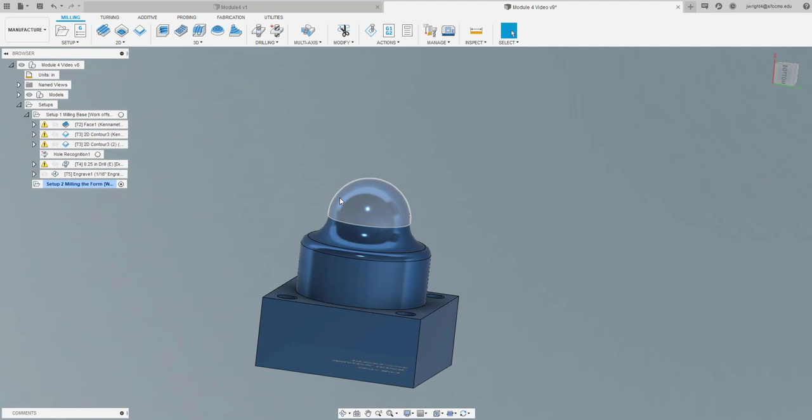And so what we want to do is bring back in that 3/4 inch tool, which is tool 3 that we did our 2D contour with. We're going to rough this entire shape out. And so I want to play with that just a little bit. I think we'll come in and we'll try to do some adaptive. And we're going to select that tool. It's already got tool 3 called up. We're going to use it. It's going to be awesome.

And we do not want to mill the entire thing, but we want to mill a lot of this thing. So I just want to change how far down I go with it. And so I want to go from this selection, and sometimes I have a hard time grabbing that, so I'll catch the hole. And let's just see what this thing is going to look like. I do want to leave a little bit of material on it as I go around it. Let's just see what we end up getting from this part.

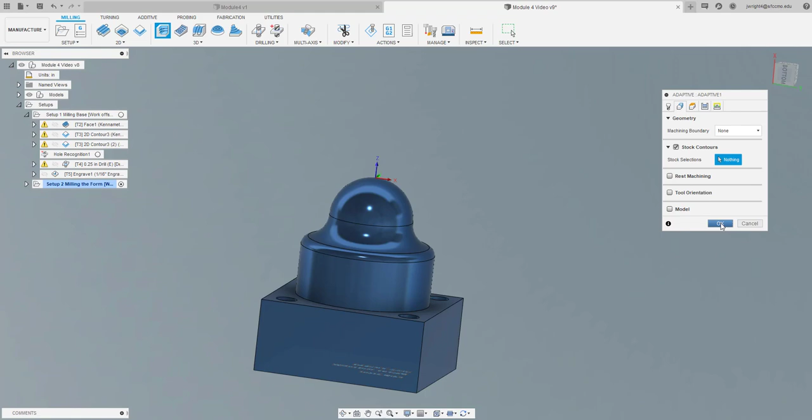All right, so that's pretty slick, I believe. So here we have a roughing out of it. Let's take a look at what it looks like graphically. Okay, that looks pretty good. Obviously, it probably won't go quite that well, but it's still tool 3. It's adaptive. Let's go in and take a look at some of the details on that thing. So we're spinning about 5,000 RPM. We've got just over a 4 thou chip load on that thing.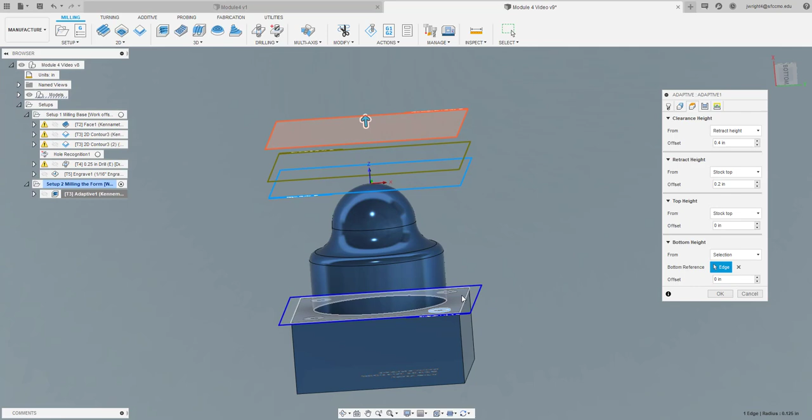We're not going to go down any further than what we've got at this face. Okay, that helps to be able to kind of trap some of that stuff in. Gosh, I don't know that I want to leave quite 20 thousandths stock in both the axial and radial sections. I think I want to go to something like 10. And then in Z, something like 5, just to bring that thing down a little bit closer. Okay, so we'll stop there. Go ahead and let that generate. Looks pretty good. We'll go ahead and do a quick save from there.

Now that I've got this thing roughed out, I need to finish this area right here, because since this tool, if you remember, has a 40 thousandths tool nose radius, I created a 40 thousandths tool nose radius down here. Now, obviously, that would be awesome to have to strengthen this up, because this kind of becomes the break point on this part if it's to fracture.

But the problem is that the print doesn't call out any kind of radius there. So you'd probably get away with 10 thousandths. Probably get away with 15 thousandths, 20 thousandths, maybe. But we don't know. So we want to try to bring that in just as small as we can. So we're going to come in and just do a contour around the outside of that thing and bring it into size.

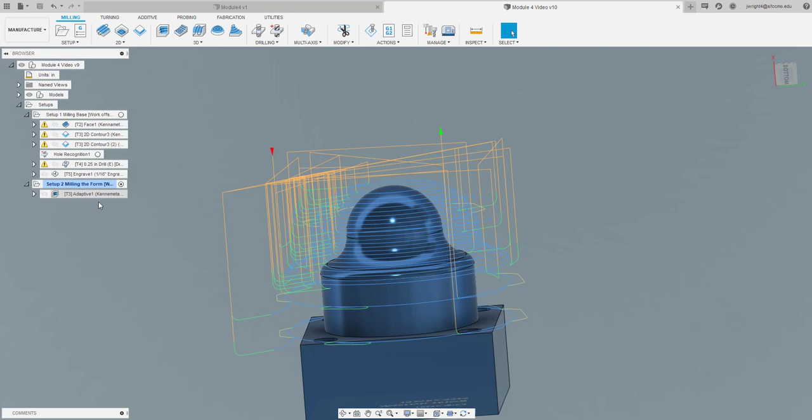Alright, so we need to come around and mill this section here with an end mill that has a minimal corner radius on it. So up until here we were at tools 2, 3, 4, and 5. We're pulling back in 3, so our next tool number would be 6 if we are running from an empty carousel or chain. So I'm going to do a contour around the outside. I'm going to pick this bottom edge right here for my contour.

I need to come back up here and select a new tool, see what I've got in the library. It would really be nice to take another 3/4 inch end mill, but I don't know that I have one that would do what I want. I know that I have a 1/2 inch square end mill, and I probably have a 3/4 inch high-speed steel end mill that I could use for that. So what I think I'll do is take this guy, duplicate him, and then just edit it up. Okay, so this is going to be a flat end mill. It is 4 flute, and we're going to say that it's high-speed steel.

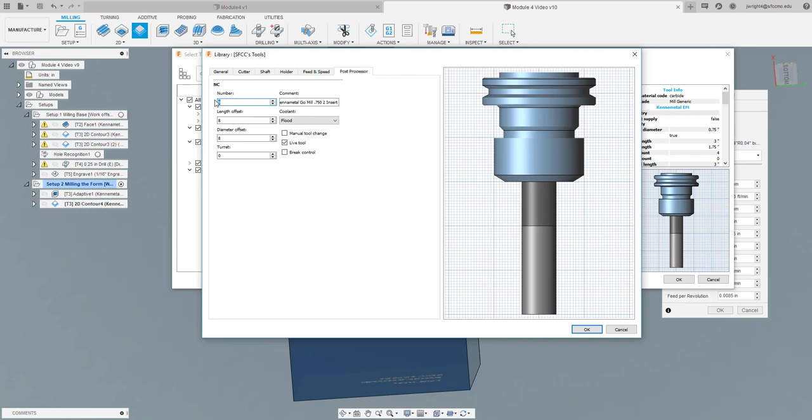Those numbers will probably still jive, so we're going to make sure that we note this as being a 3/4 inch high-speed steel end mill. Speed and feeds will definitely change. I want you to go ahead and calculate those out. Don't just use what I have. So I'll go with 5 thousandths just as I'm throwing this together here. It could be tool 8, but for our purposes, I think I'm going to make it tool 6. And then select and go from there.

And so now I've got my tool, I've got my contour, everything else should really kind of fall into line. And let's see what it looks like. Yep, looks good. That's a good end mill to use. It should be able to grab, shouldn't leave any corners on here, but let's take a look just to make sure, because if it does, I want to go ahead and copy it and offset the pass on that. So let's go ahead and run that through in graphics.

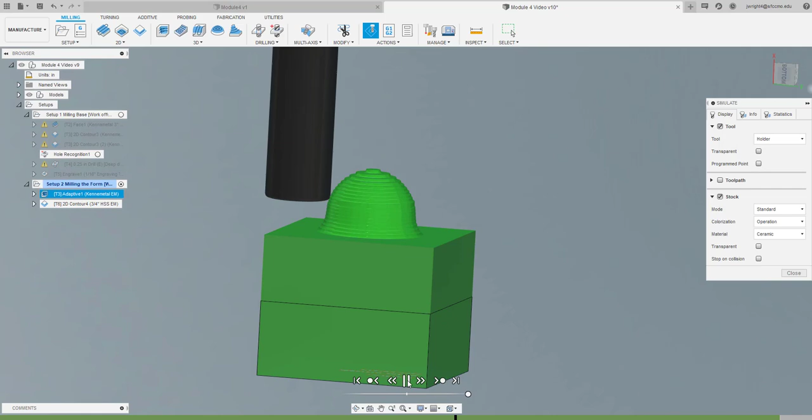Okay. So what I was concerned about is if I use a small end mill, I will end up with a little small scallop around this outside edge. And so let's do this. Let's just say, just for demonstration purposes, we went in and selected this half-inch end mill, half-inch flat end mill. Okay, so let's just say we used it. Now, let's run that graphics.

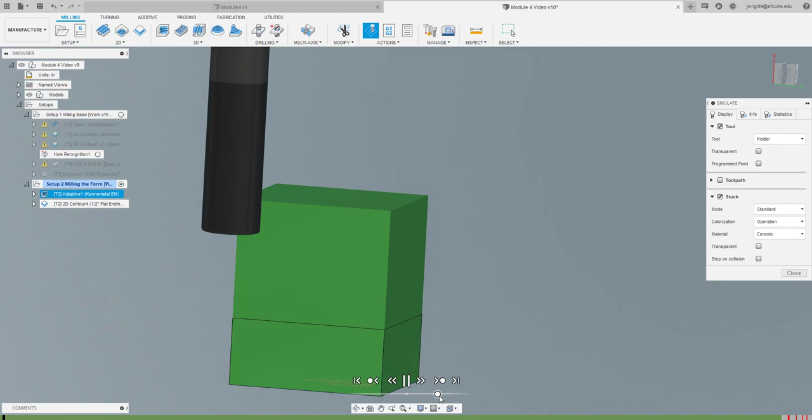Okay, so here's what I'm talking about. What you get is the scallop left here. So the blue is what just got finished, and the green is this area that's left. So if I had a half-inch end mill and I wanted to use that, here's what I'm going to need to do. So I take this tool, and I need to go in and edit it real quick. So it's going to be tool 6. Tool 6 is the half-inch 2-flute.

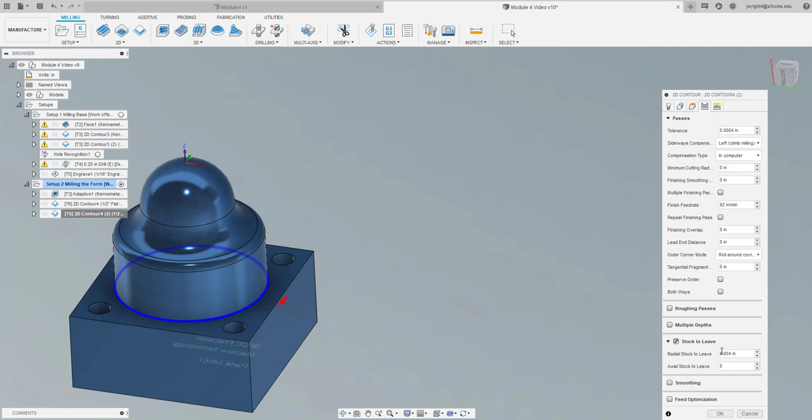I did not check speeds and feeds on it, and so what I'm going to do is I'm going to duplicate it, and then I'm going to go in and do a quick edit to it, and stock to leave. I am going to leave nothing in Z, and I would leave, oh, maybe let's just see what an 1/8 inch looks like. And so what I now end up with is 2 paths going across there. So see, I've got a finished pass, and then I've got an outer pass to take care of that section.

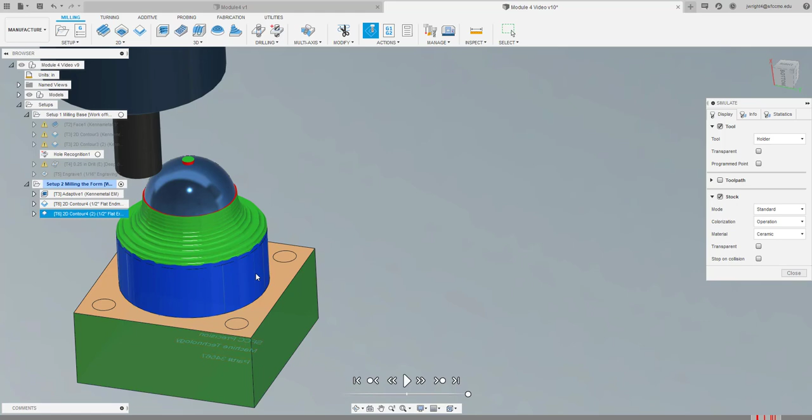So here we are. Go back, speed this thing up, and I've just got it spinning through there pretty fast. So graphically, it's not going to look perfect. But see now, all the tan is what this tool has done, and so I can leave it like that. You know, I probably wouldn't want to try to do that. I would try to make it as big of a tool as I could. That would be better for it. So I've got that finished out now in 2 passes. I can leave that tool alone if I choose to. Go ahead and get this thing kind of pushed back into place. So my second operation is using tool 3, tool 6, and we'll do 2 pass with tool 6.

So now the one that I wanted to play with just a little bit was coming around here and doing some 3D on the top of this. And there's a couple of different 3D options that we can use. Probably what I would see myself using more than anything is on a situation like this. And it helps if I know what this part's doing. It does not call out a surface finish on it, but I do assume that it is supposed to be pretty smooth and not all janky and have a lot of scallops in it from the machining process.

So here's what I'm going to start with. I'm going to see what this looks like. I'm going to go radial, and I'm going to need to pull something that's a ball end mill and go in here, probably something like a 3/8 ball end mill. So I've got a 3/8 ball already set up. I'm going to use it, and I don't think that I want to leave any material on. I think I want to go ahead and just do it because I've already roughed it out.

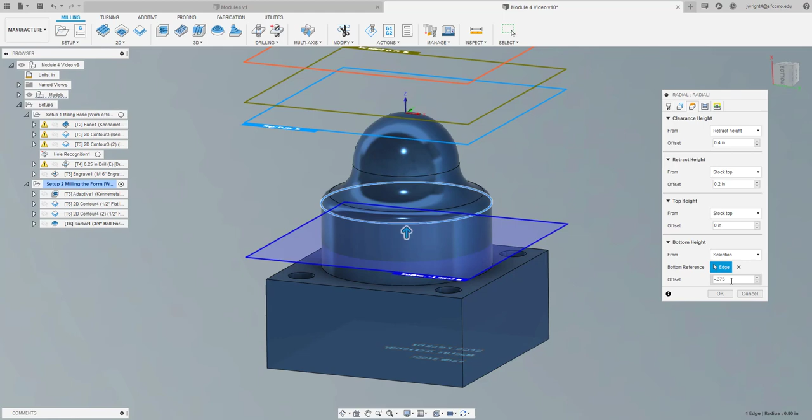So if our radius from that is 187, let's say we go down 190. Should be plenty to go through that. Okay, that should take care of that. So look at what we get. This slick looking pattern that's running across this thing. Now, one thing that you have to think about, this is a lot of movement, and it's going to take a little bit of time to do this. So let's just see what this thing looks like.

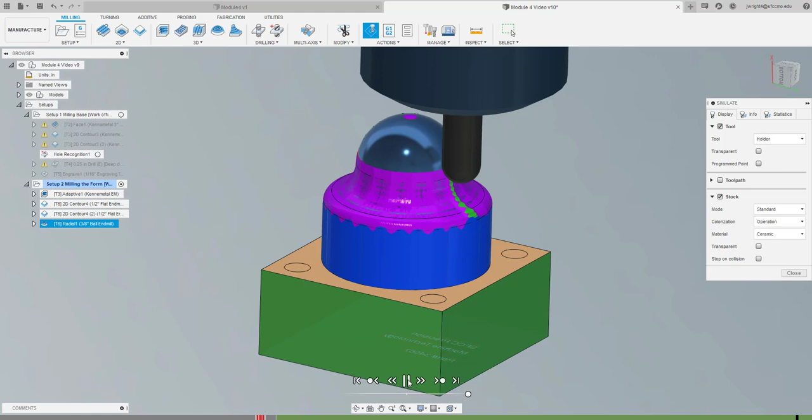Okay. So we can control our surface finish by step over, and some of the components for that. Speeds and feeds would definitely be doing some things there. We could definitely speed that thing up at 6,000. So like I said, we can control how that thing runs. It could run only downhill, only uphill and downhill. We could leave some stock. We can push in some areas that'll make it cut just a little bit better if we need to. For me, I'm probably going to go ahead and run this part the first time, see what it looks like as far as surface finish, and then make adjustments from there.

You know, feed per tooth of 5 thousandths. I mean, you're really just rolling up and down that hill, and I think it could look pretty decent that way. I'd be more concerned about my step over through here. The only thing that I would probably change is I'd change this to 8,000, and that's probably all that I would change at this point, and just leave that alone. That cannot be tool 6, so I do have to go in and edit this tool, and we'll make it tool 7.

And then we can create another setup. And so this is my NC program for that. And then I can go in, set up another one, and we're going to call this 3457, and we're going to call this side 2. We're going to pick our operations. This is going to be setup 2. And hit OK. And so now I have NC Program 1 and NC Program 2.

From here, I can go ahead and hit post-process if I want to. Come down here, grab my NC code. I'm using 2345, and that is going to be my face mill. My 3/4 end mill with a 40 thousandths tool nose radius. I've got a 1/4 inch drill, and I've got then my engraving tool.

And so this program should not be terribly long. The engraving is going to be your hard part. That's going to be your long section of code. The rest of it should go pretty smoothly. Okay, so there's that, and then we go to NC Program 2, and we can post process it. Grab that thing. So we're calling up 3 again, and then 6 and 7. And now this one is just going to be really long all the way through.

And so the only thing I want to double check is really work offset. Okay, so I've got, not seeing a G54, 55, anything in there, so work through some of that. So probably what my problem is I did not select my machine, so I need to go back and do some work on that, make sure that I've got my right machines picked. Let's go in and edit program 1, go back, and here is my problem. I did not pick a machine.

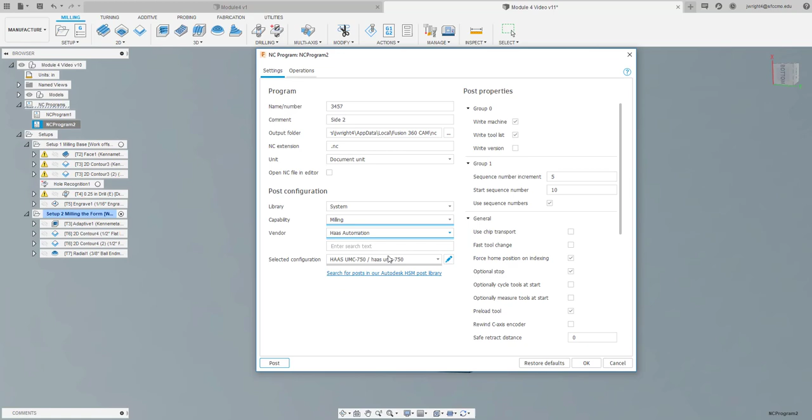So I am going to mill. I am going to use my Haas Automation UMC 750, and then let's hit OK from there. And then the same thing here. Let's go back in and edit that. The right ones. UMC 750. Okay. Now let's just take a look at one of them, and we will post process. Yeah, we want to redo those ones that we hit. Now we look just a little bit better.

So if you notice, we're now at G55. This G53 is just getting ourselves out of the way. That way, if we've got the table that needs to spin around, since this is a UMC 750, it's got those 2 extra axes that you can spin around and move where they need to. That is a pretty good program from that point. And so you've got both operations now stuck inside of this one program.

And so I can save it. And then I could use it really just however I want. So if I wanted to do 2 vise setups and run these 2 things in parallel, or I wanted to just run all of 1 and then all of 2, I can definitely do that. You want to make sure when you're posting out or running some of your operations, you're selecting the setup when you're running through graphics. And then here you have NC Program 1, NC Program 2.

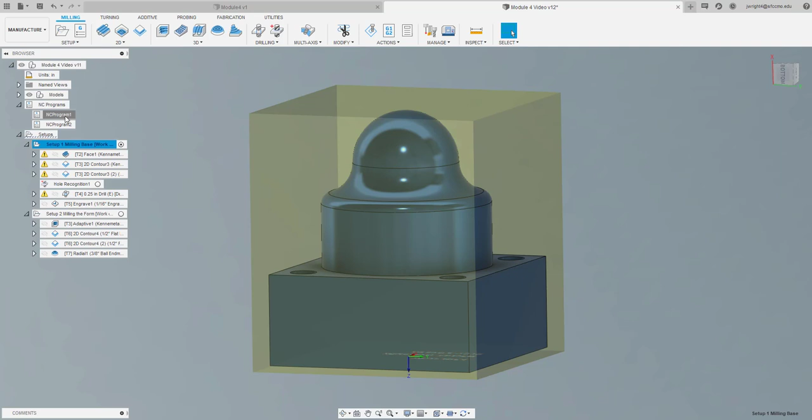Okay, so I'm going to give you a project that is similar to this one, but it is not going to be the exact same thing. You will do the drawing and programming, and a couple of you are still having some problems with this: you need to save your Fusion file and submit your Fusion file and your NC program to me. 90% of you guys are doing just great on that. Everybody's giving me their NC files without any problems. So this one I have 2 NC files. But some of you guys are still having problems getting me your Fusion files.

So you want to save that thing, save it to your desktop, and then submit it through Canvas, and that'll make things go a lot easier. Because that way, if I have a question, I can get into your Fusion file and work from it and help figure that out. Otherwise, I'm just not giving you full points for it. So anyways, take care of those things, and then this module will have the assignment that looks similar to this, and then there is going to be a second assignment inside of this. So this is module 4, and there's going to be an A and a B. So you're going to do a Titans CNC part as well. So don't wait till Sunday to open this thing up. All right.